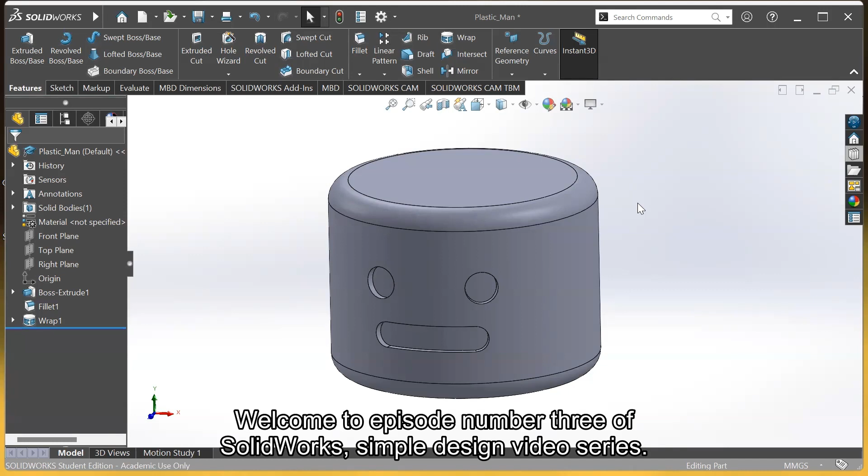Okay, so I'm going to show you how to create two features from just one sketch.

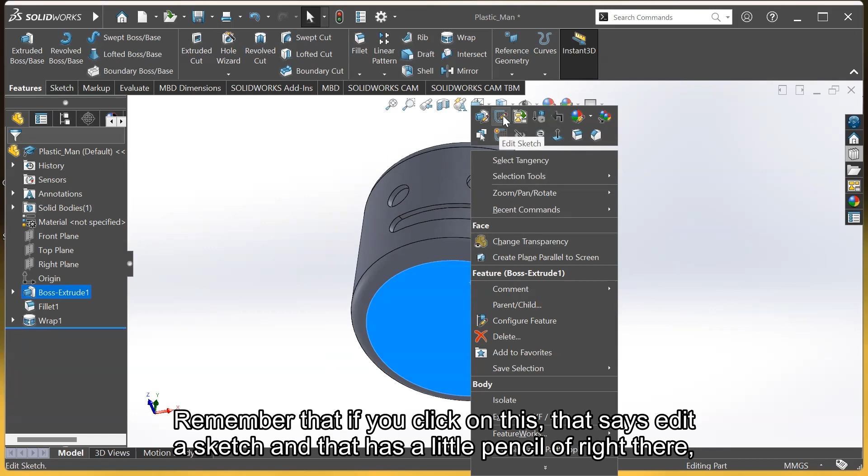We're going to create a sketch here in the bottom. To do that, we right click and then click on Sketch. Remember, if you click on the option that says Edit a Sketch with a little pencil icon, you'll be editing the sketch that already exists. So we're going to create a new sketch by clicking on this other symbol instead.

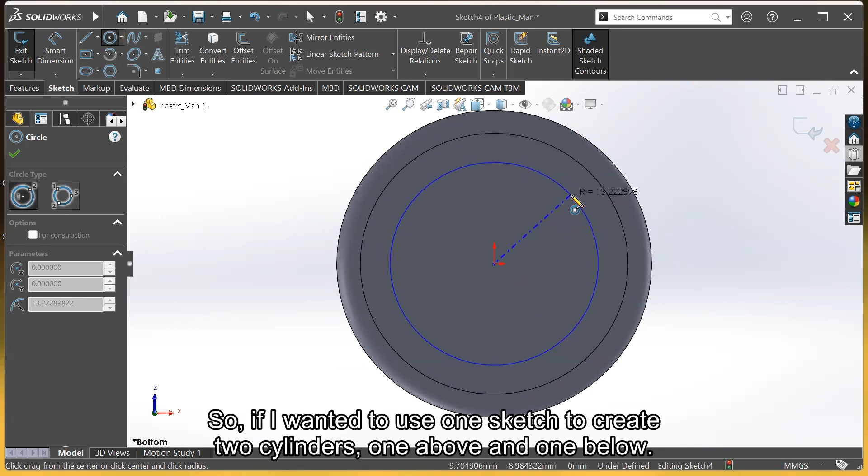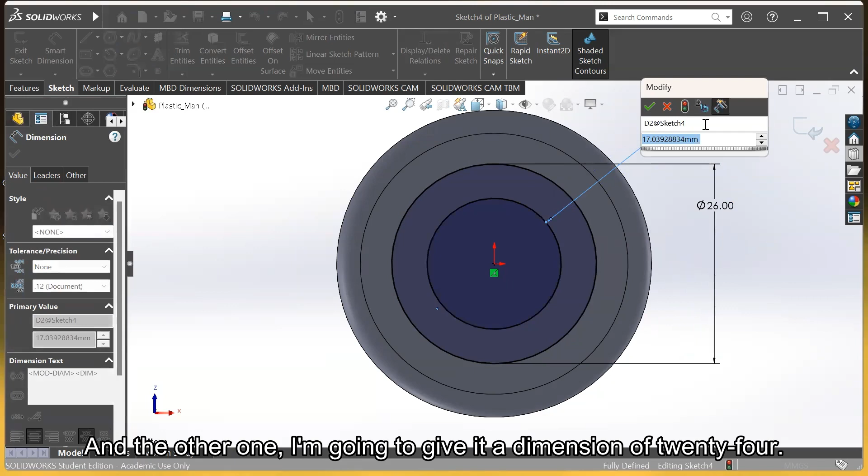If I wanted to use one sketch to create two cylinders, one above and one below, what I'm going to do is create two circles, one bigger than the other, then give them a dimension. In this case, maybe 26. And for the other one, I'm going to give it a dimension of 24, or maybe 22. 22 sounds good.

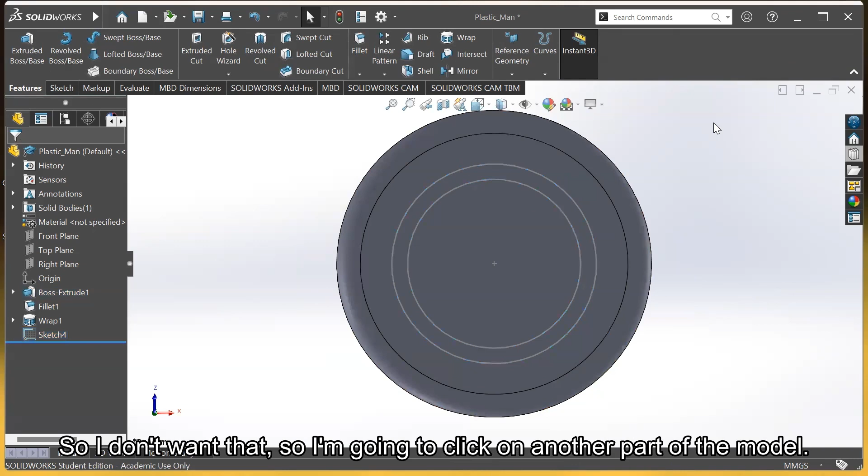I'm going to go out of my sketch. As you can see, it automatically selects the sketch, but I don't want that, so I'm going to click on another part of the model so it doesn't appear. Now, as you can see, I have two circles.

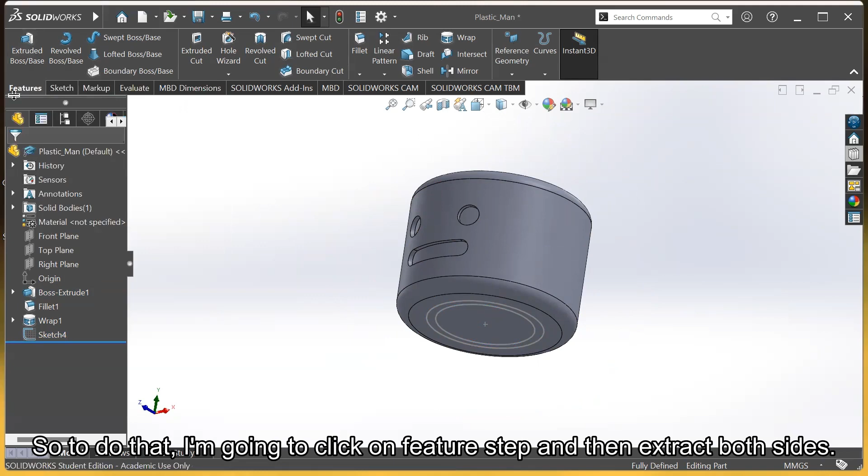I want one of them to be extruded down and the other one to be extruded up. So to do that, I'm going to click on the Features tab and then Extrude Boss Base.

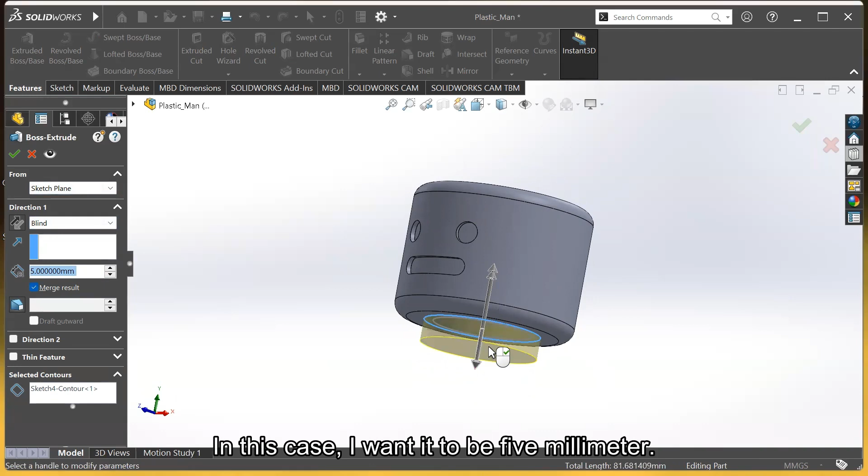I'm going to select this circle over here. And when I select that circle, I can start selecting the height. In this case, I want it to be 5 millimeters. I'm going to click OK or right click.

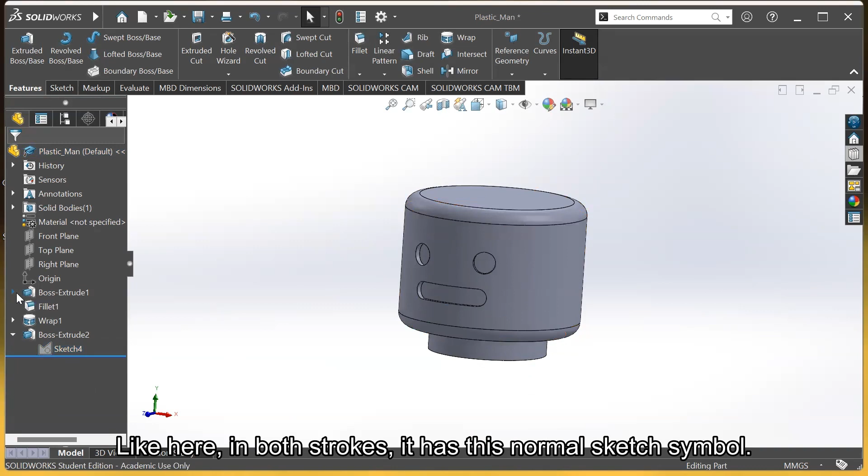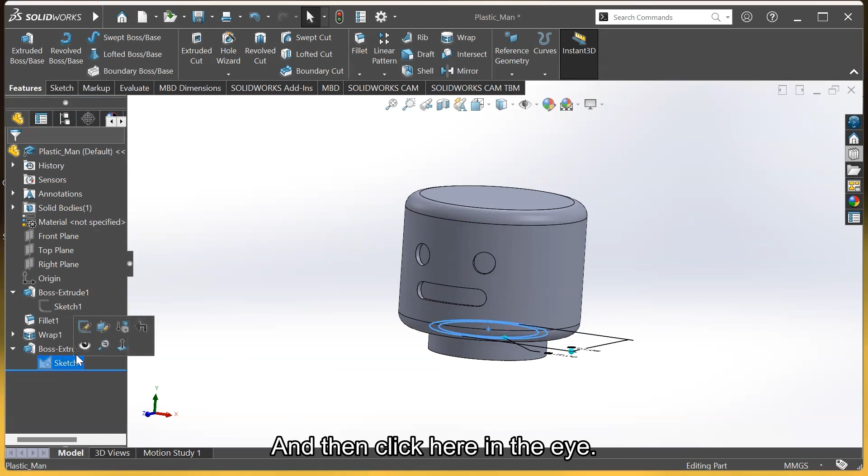To access my previous sketch, I just need to click on this arrow over here and click on the sketch. As you can see, it has a different symbol. Like here in Boss Extrude it has this normal sketch symbol, but now it has this weird symbol over here. That means it hasn't used the whole sketch, just one circle out of the two I created. So I'm going to click on the sketch and then click the eye icon to show it.

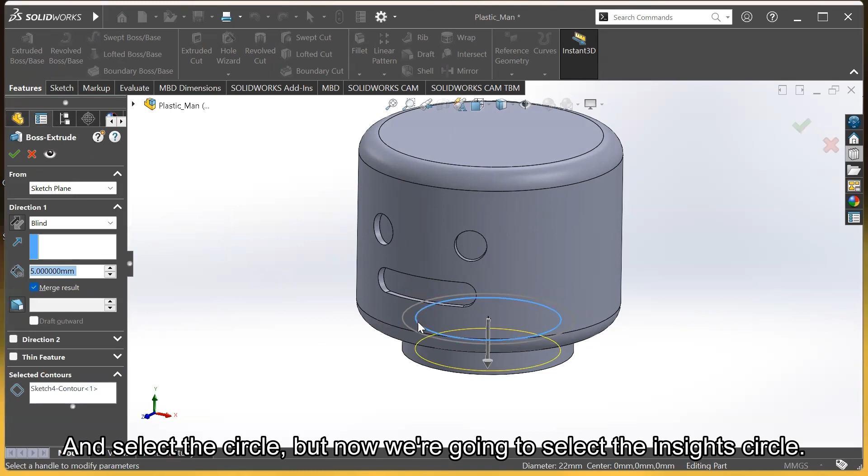Now here I'm going to select Extruded Boss/Base again and select the circle, but now we're going to select the inside circle. And I'm going to change the direction by just moving the arrow.

Now I can have like the head of my little man. I'm going to leave it maybe at 36, or maybe less, at 34. And I'm going to right click.

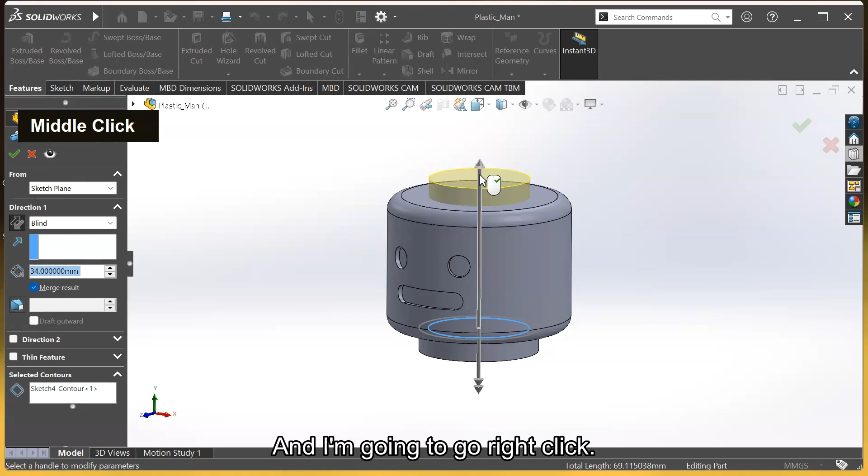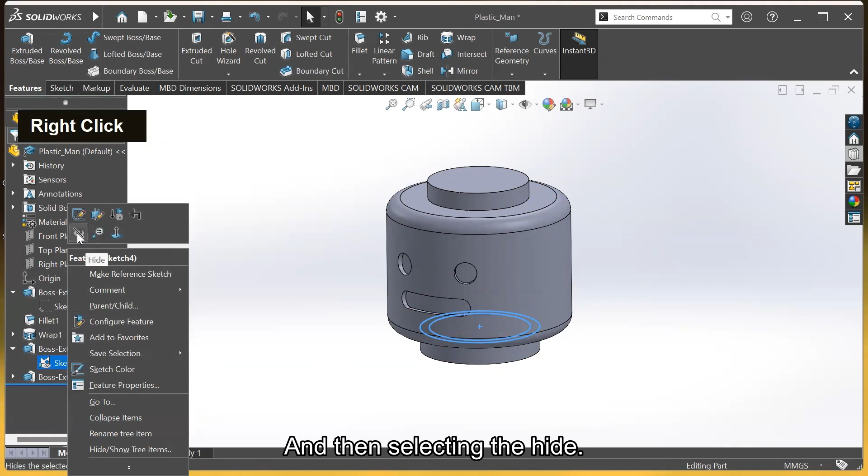Now I have one sketch that's used for both the neck and the head of my little man. I can hide this sketch by right clicking on it and selecting the hide button, which is the little eye icon. Now I have the neck and the head of my little man.

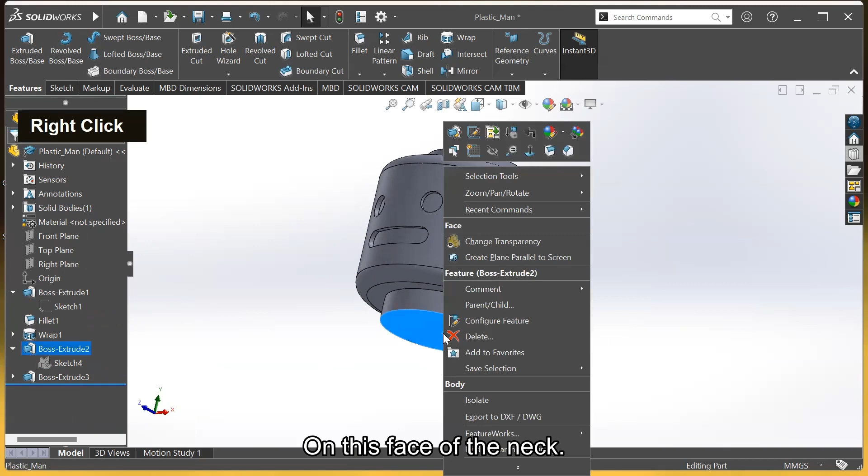So I'm going to start adding the body by right clicking again on this face of the neck and creating a new sketch.

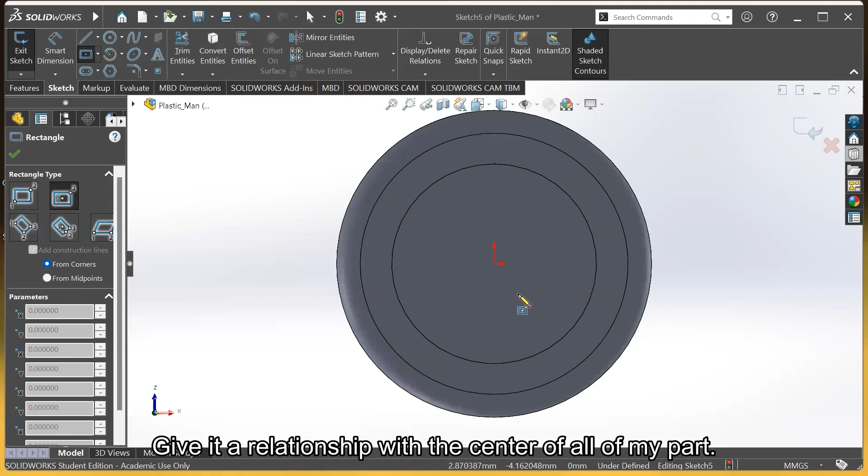Now, as you can see, there are different ways to do a rectangle. The default one is the corner rectangle, but we're going to use the center rectangle so we can easily give it a relationship with the center of my part.

So we're going to click on it, and then we're going to make it maybe like this. So I'm going to select Smart Dimension.

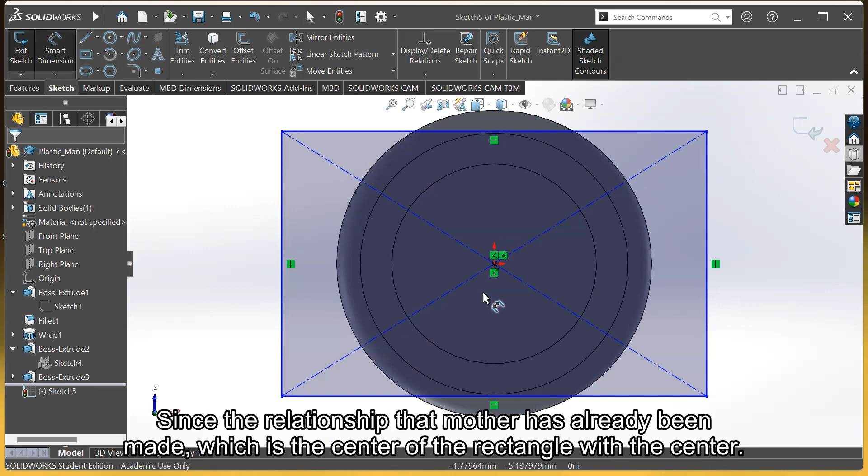Since the relationship that matters has already been made, which is the center of the rectangle with the center, or point of origin, of my part, I'm going to select the height of 34 millimeters. And I'm going to dimension this with 50 millimeters, or maybe a little more, 52.

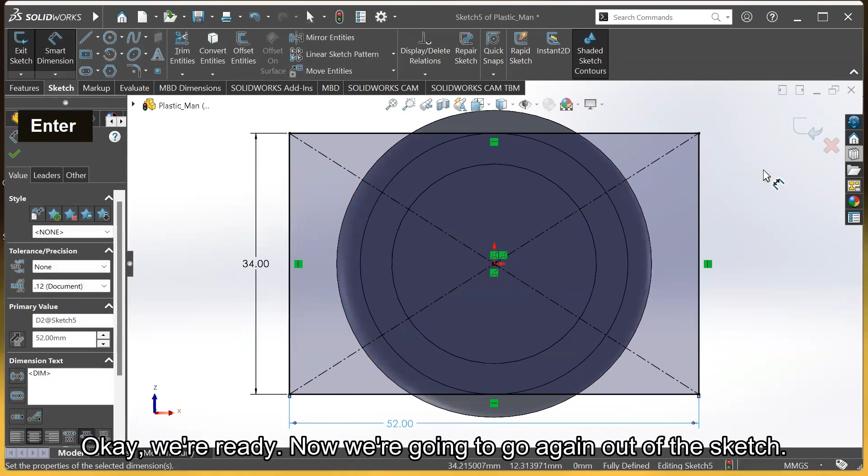Okay, we're ready. Now we're going to go out of the sketch again. And now the sketch is automatically selected whole, but that doesn't matter.

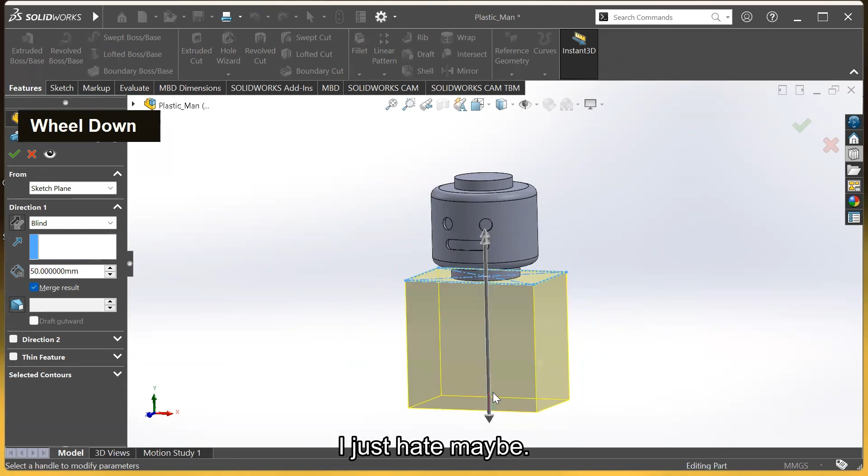We're going to select Extruded Boss/Base again. And I'm going to make it this height, maybe 46. I'm going to right click.

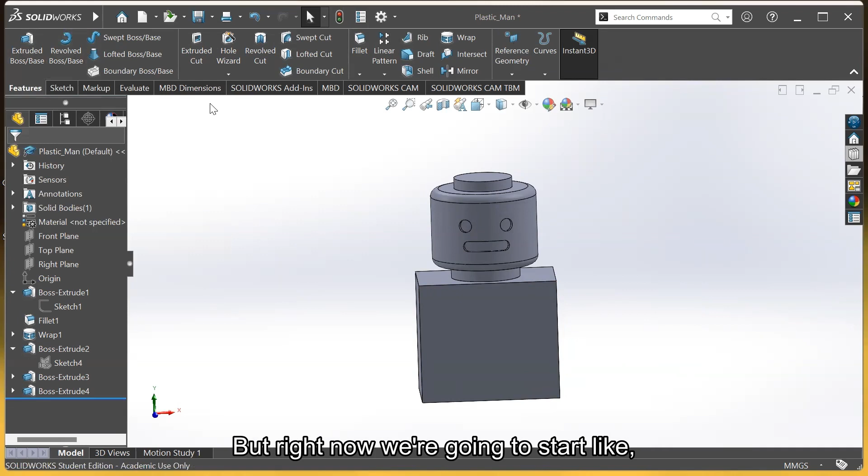If I want to give this little man a different shape, I can make cuts. Right now we've only made Extruded Boss Base, but now we're going to start cutting or modeling our square here by using Extruded Cut. It's easier shown than explained, so I'm going to show you first by creating another sketch on this face.

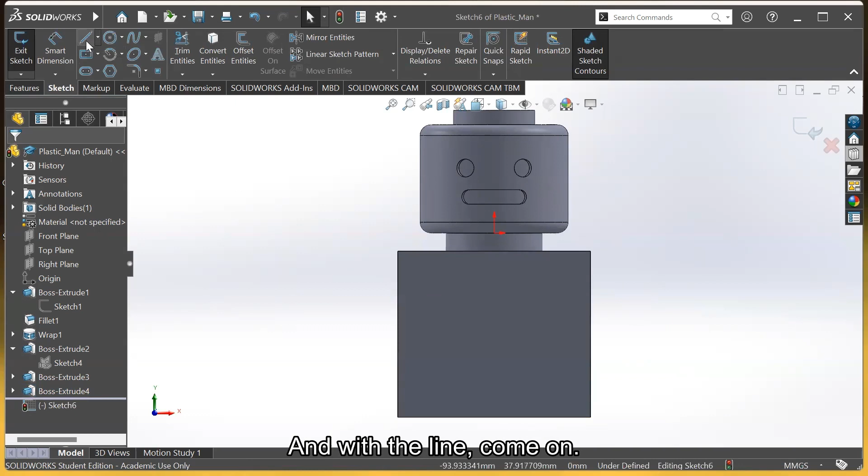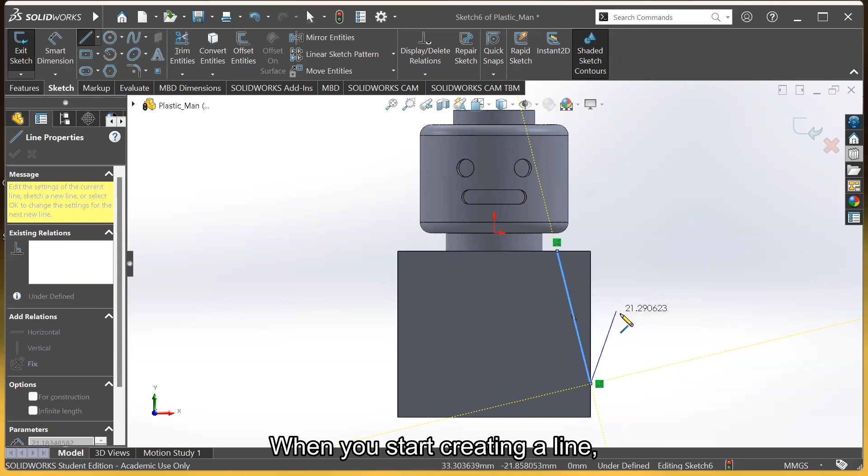And with the line command, line over here, or by just pressing the L button of your keyboard, we can make a form like this. Okay, so I'm going to make it maybe like over here. When you start creating a line, you can keep drawing the line by just going ahead to the next point and to the other one.

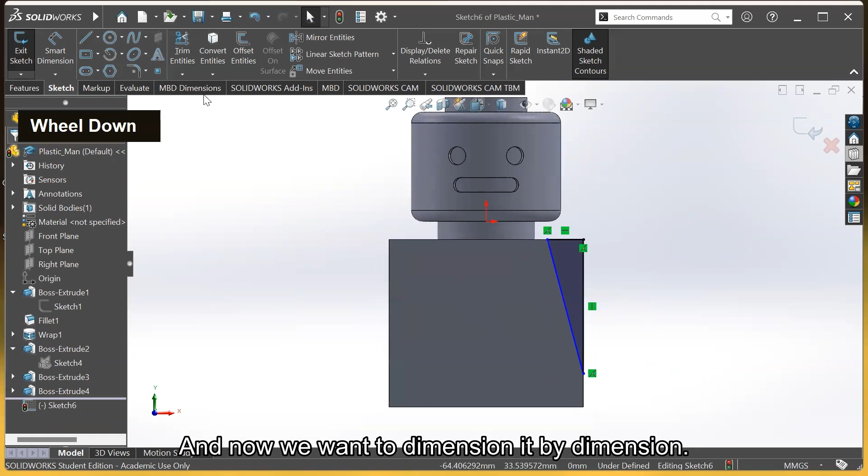As you can see, this line now encloses a defined area, okay? So that's what we want. And now we want to dimension it, this with maybe 10 millimeters, and this one with 36 millimeters, okay?

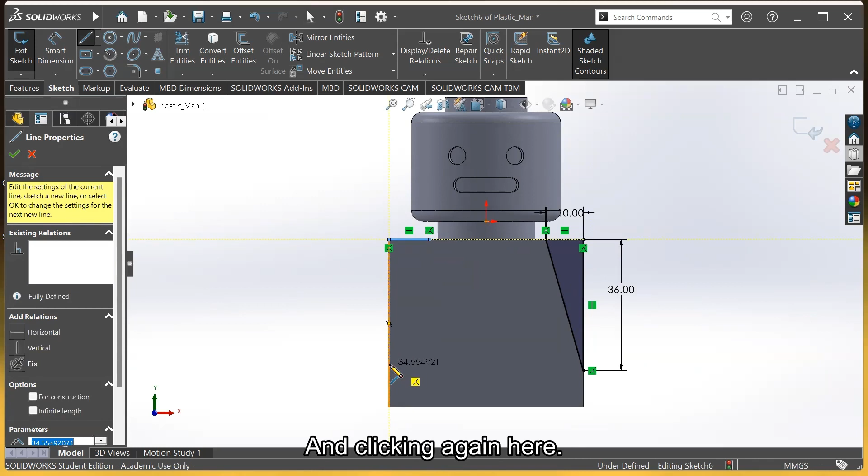So if we want to repeat this on the other side, you can make the triangle again by selecting the line command, then clicking on this line, then clicking on this point, then clicking again here, and clicking on the same point, and then dimension it again.

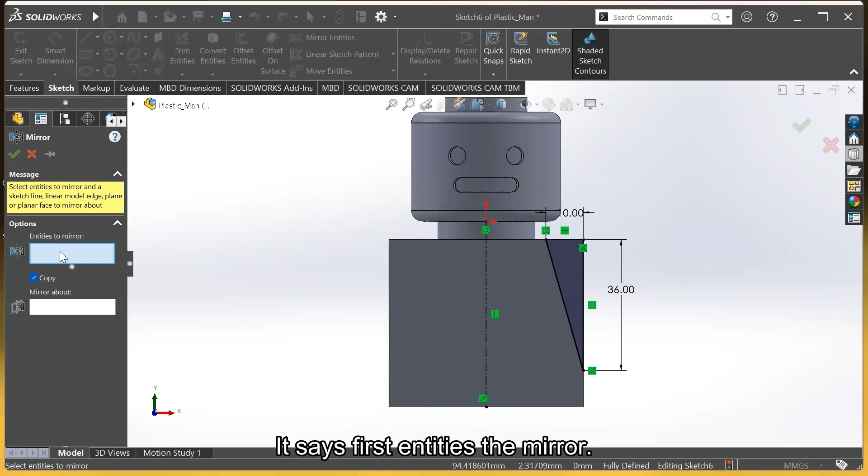But I'm going to show you an easier way, which is to use another center line, which goes from the point of origin to whatever point, maybe here, and to use mirror entities, which is this operation over here. It says entities to mirror, and I will select this whole triangle that I made. And now select mirror about, which is going to be the center line that I made. I'm gonna right click to finish my operation.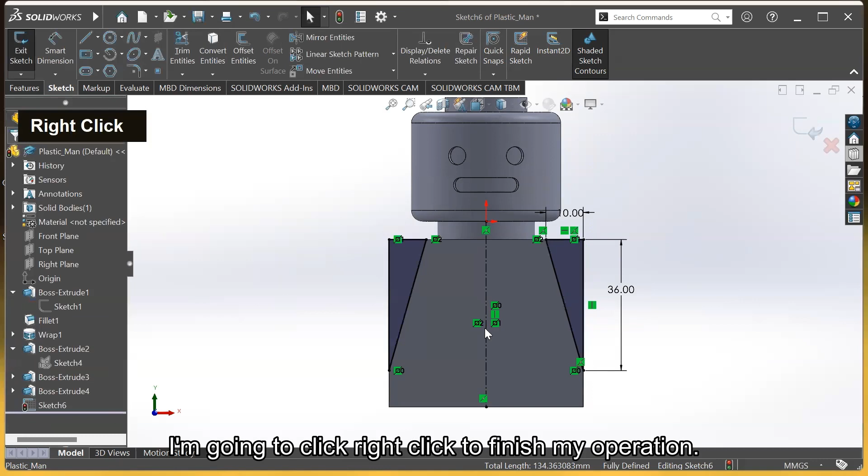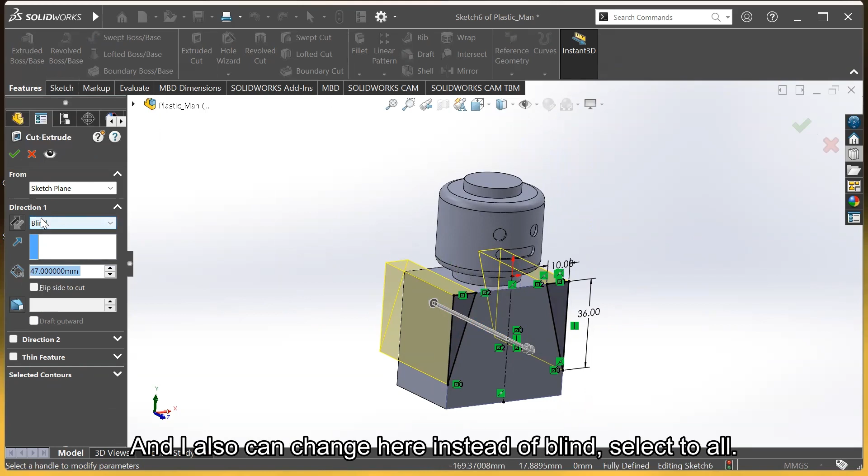And now I'm going to use, in features, the extruded cut. With the little arrow, I can change how much I want to cut it. And I also can change here, instead of blind, select through all, so it will cut through all my part. Okay, so I'm going to say yes. And now my little man has another shape.

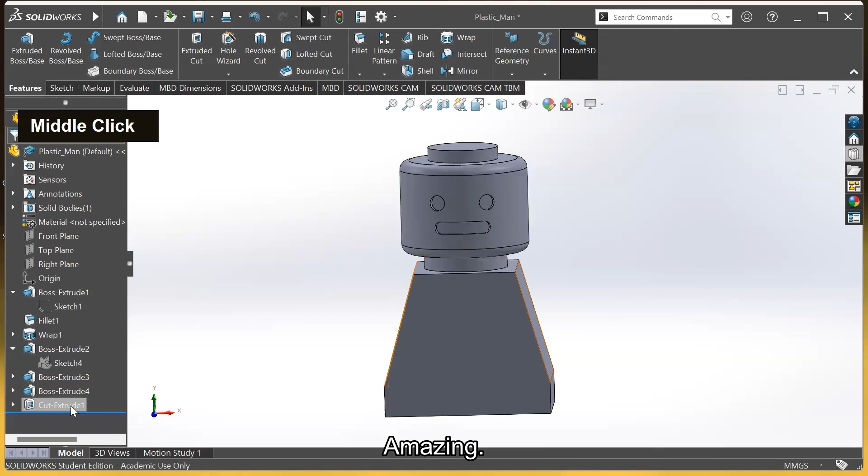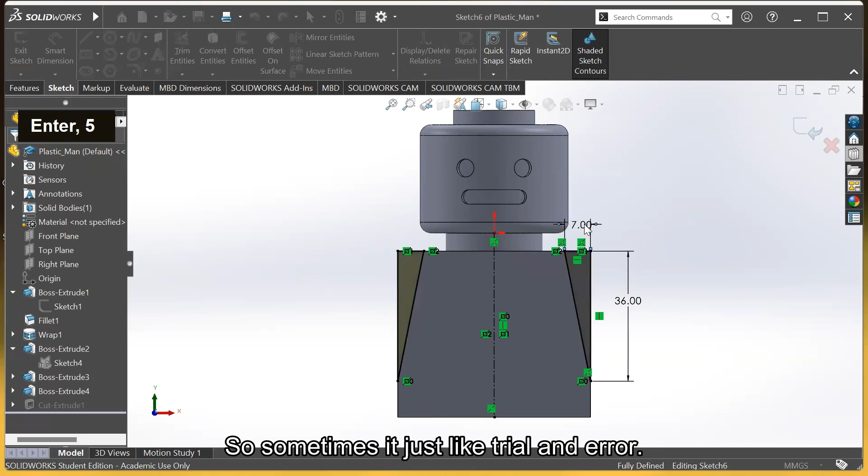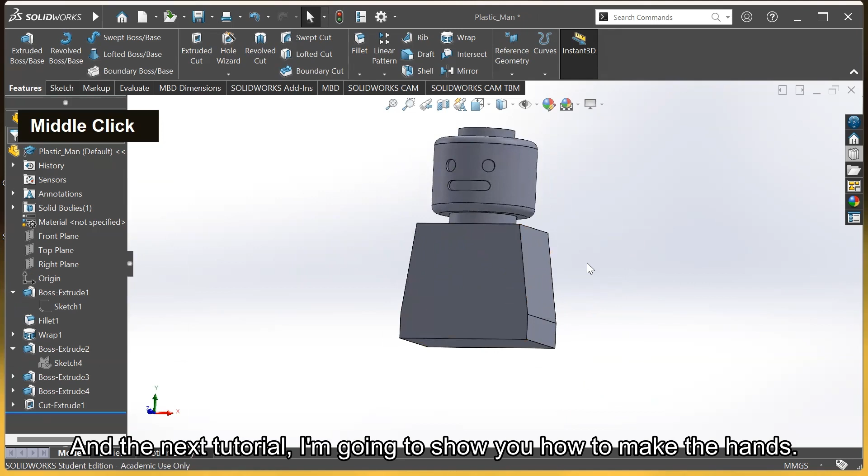Amazing. So I can change and edit this sketch. If I'm not okay with this, I can change it maybe to 7 and then go back. It gets close to what I want, but it doesn't quite. So sometimes it's just trial and error, okay? I liked it this way. So now I can start making its feet, but for now it's going to be okay. In the next tutorial, I'm going to show you how to make the hands. But right now it's okay, so I'm gonna leave it right there.

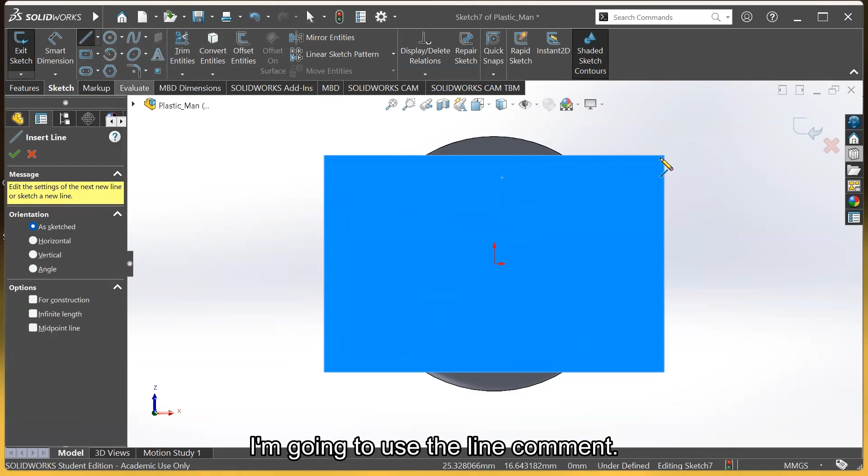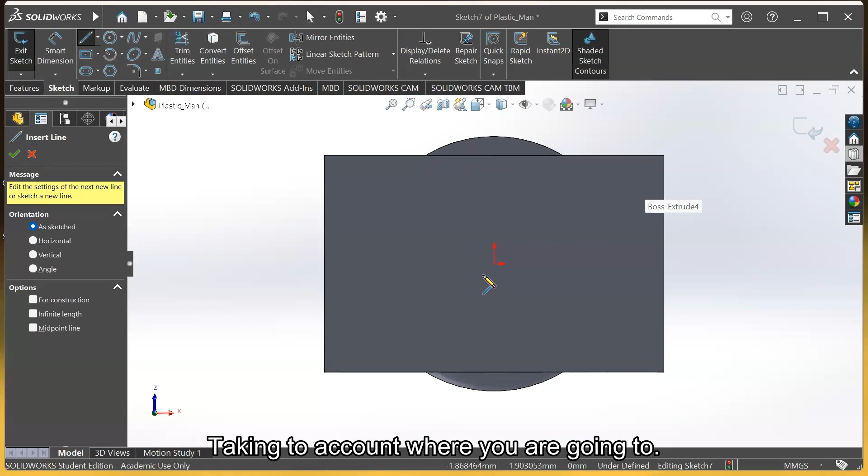And finally, I'm going to show you how to do the feet, which is important too, actually. You can do them several ways. I'm going to use the line command and maybe make them smaller than the rectangle here. One tip I can give you is when you start creating lines, take into account what you are going to relate them to, because you can relate them either to the point of origin or to the edges that have already been created, okay? So be aware of that when you're creating your lines.

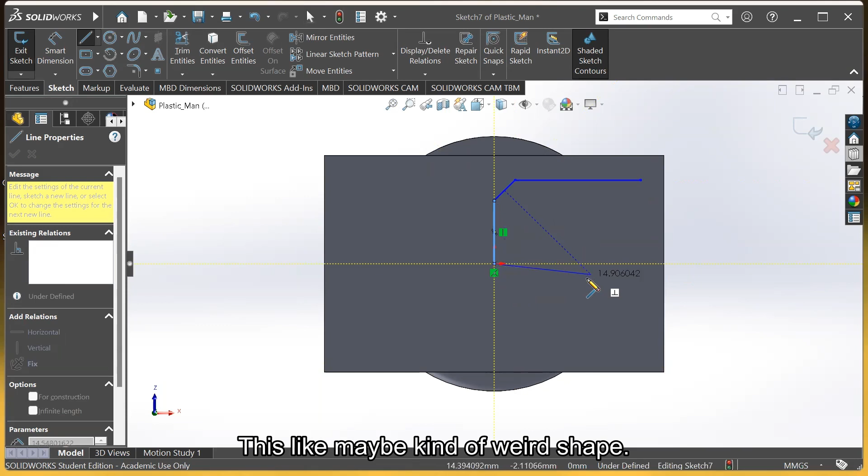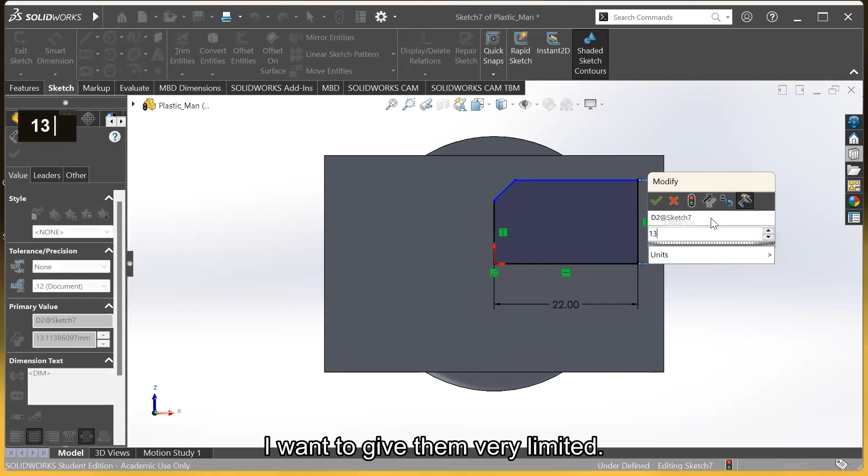We're gonna click here, then here, and we're gonna create this maybe kind of weird shape. Yeah, we're gonna fix it later, but right now we have this shape here and we're gonna dimension it with 22, and its height I want to give 13 millimeters. And as you can see now, it's not fully defined.

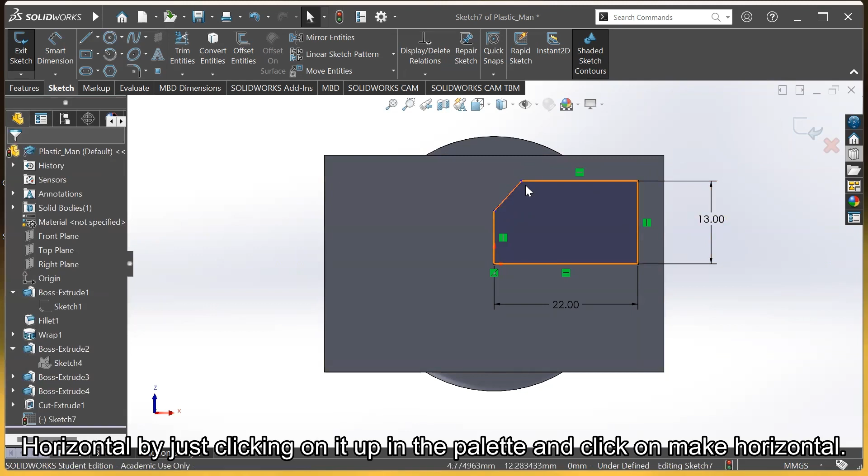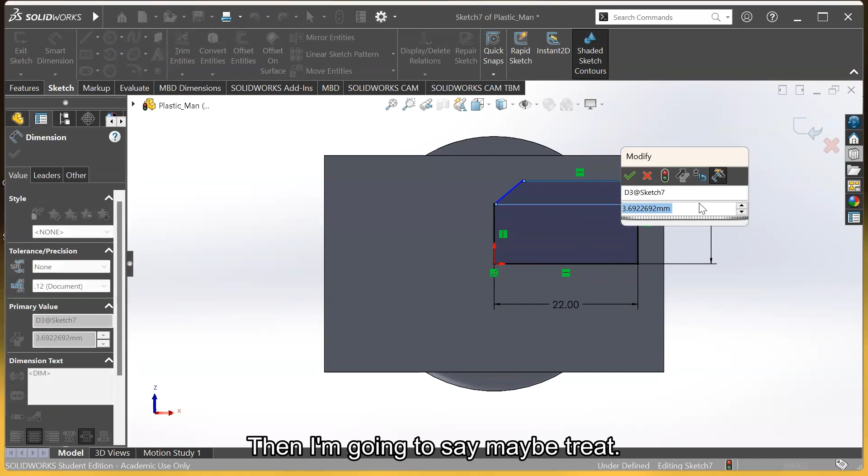So first of all I'm gonna make this line horizontal by just clicking on it, opening the palette and clicking on make horizontal. Now I can move this to the side, up and down. So what I can do is dimension the height of this and it will be fully defined. So I'm gonna do that by selecting this point and then this other point, moving my mouse over here, then I'm gonna say maybe 3. And I'm going to select the 2 points again, but moving my mouse over here, and select 4.

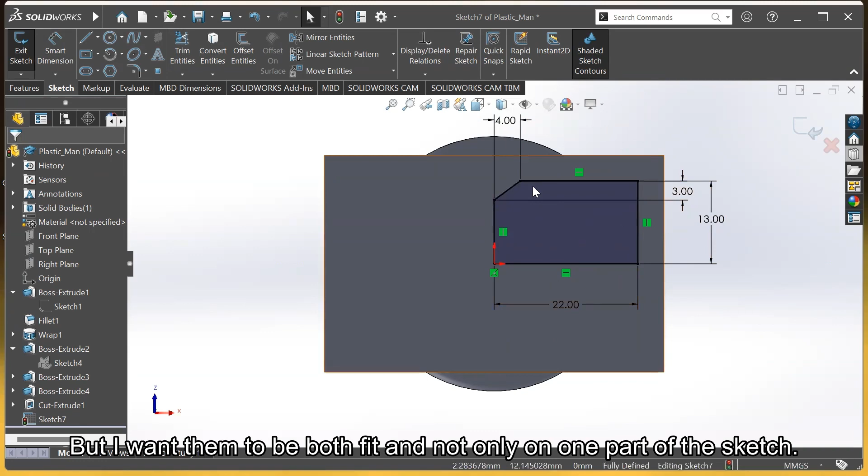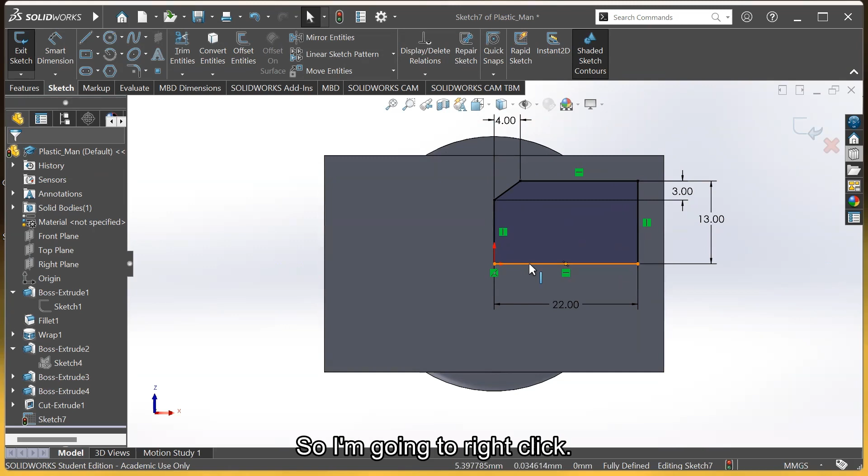Okay, now it's fully defined, but I want both feet and not only one part of the sketch. So I'm going to use mirror entities again, but with these 2 lines. As you remember, to mirror entities we used a center line, but we can also convert this line into a center line. So I'm gonna right click, then construction geometry, and again, construction geometry. Amazing.

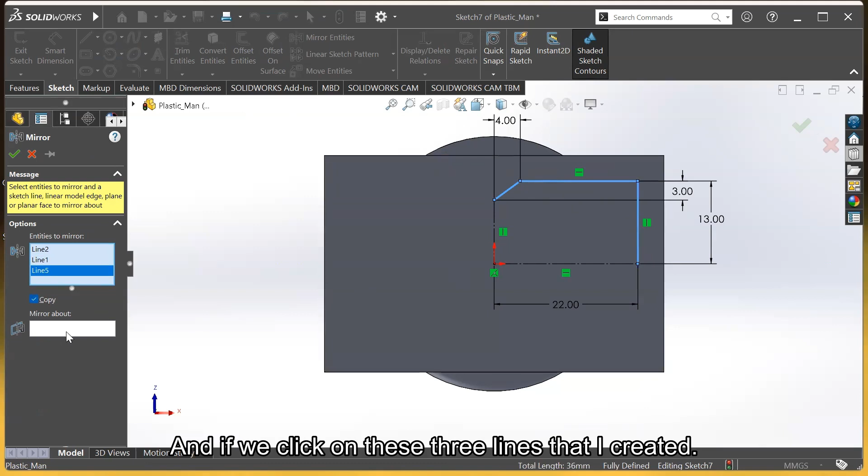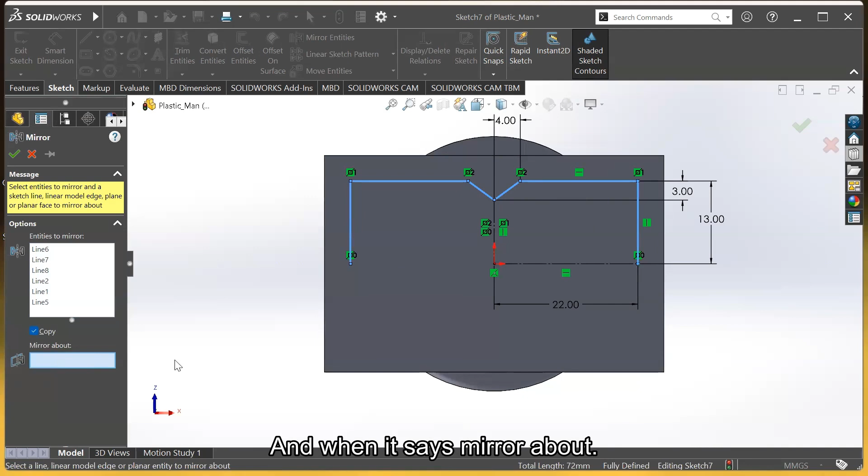Now, when we click on mirror entities, we click on these 3 lines that I created, and when it says mirror about, we select this and select OK. We now have a mirror of these 3 lines. And we can repeat that operation by selecting all of the lines again, and when it says mirror about, we're going to select this other line and say OK. Great. Now we can start extruding the feet.

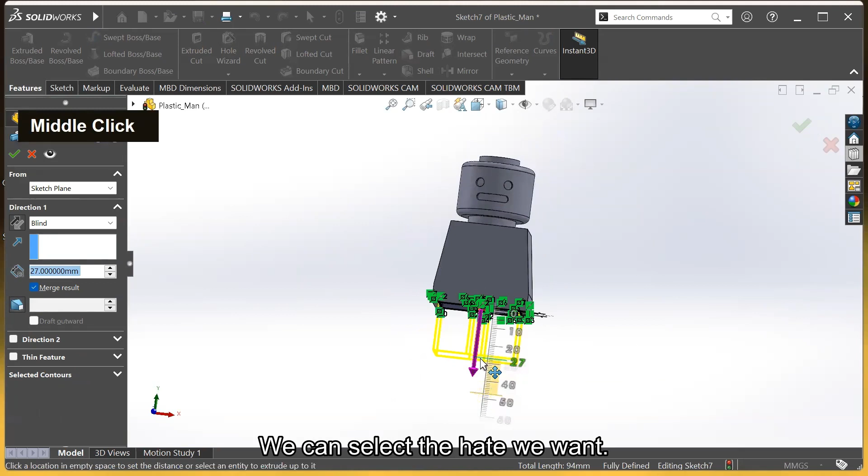We're gonna go to features and then extruded boss base. We can select the height we want, maybe right here. And we're gonna say maybe 28, it's okay. So we're gonna say okay. And now we have finished the feet of this little man, and its body, and in the next tutorial we're gonna make its arms and hands.